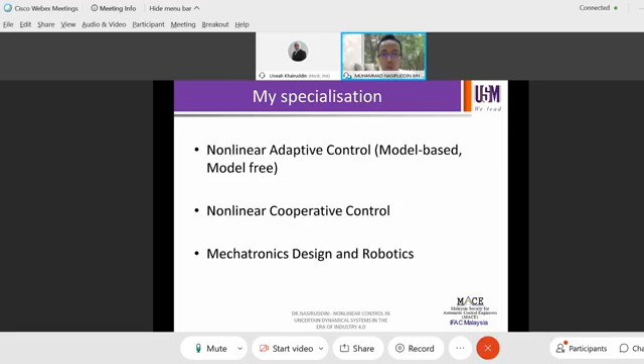Here's my specialization: I did my research in adaptive control, nonlinear control, and ventured into cooperative control. These two areas are my topics of interest. For today's talk, I would like to discuss mainly two types of systems: first, a single dynamical system with nonlinear control, and second, a cooperative system.

Before I begin the main technical talk, I would like to share with all of you some bits of motivation about control theory and technologies.

As you know, control is one of the driving technologies in Industry 4.0. In the case of a smart factory, components such as monitoring tools, instruments, sensors, HMI, and robots are essential, and control system is one of them. Control is often regarded as a hidden technology as it operates in the background of a dynamical system.

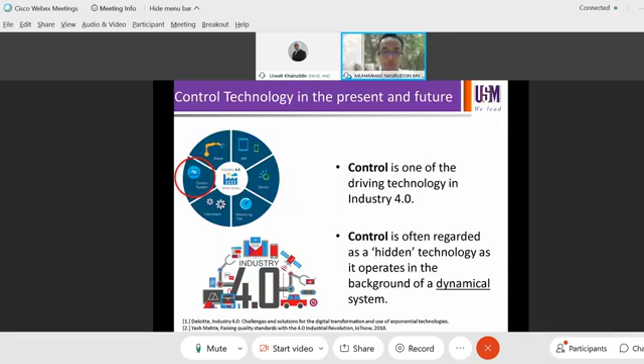Let's look at the modern factory. We can see a mobile robot, an independent robot doing warehouse safekeeping, and a specialist robot that does welding, painting, and material handling. As you can see clearly, human workers need to stand at a safe distance.

As robot technology evolves, humans can stand closer to the robotic arm because they have been equipped with some bits of compliance features. At the end, we see a Baxter, which is meant for cobots, or collaborative robots, created by Rodney Brooks. This particular robot is capable of a self-learning feature.

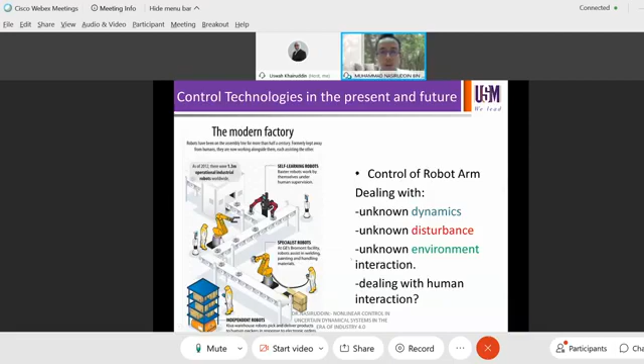In a nutshell, in the context of control, when we want to control a robotic arm we have to deal with unknown dynamics, unknown disturbance, and unknown environment interactions. In the context of a collaborative robot or cobot, we need to deal with human interaction. Therefore, uncertain dynamic information needs to be known or estimated when designing a suitable controller.

On the top left, we have a cooperative robot: two robotic arms trying to synchronize motion in pursuit of balancing a cup of water. On the top right, we see a Baxter capable of self-learning, but the dynamics remain unknown.

We also have a case where a robot is deployed or commissioned to do tasks in a remotely challenging environment, meaning an environment where humans cannot go, such as nuclear or very hazardous environments. In this case, the robot is deployed, but it is very important that they be controlled.

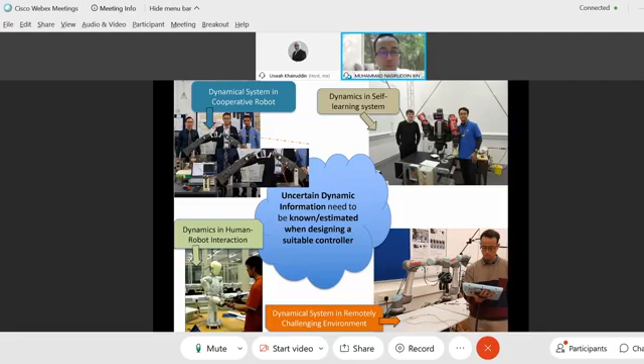The control strategy requires this dynamic to be estimated. In the bottom left, in the context of social robotics where human-robot interaction is involved, there are so many uncertain dynamics that need to be known when designing a controller.

In summary, uncertain dynamics can be classified into three parts: first, unknown or partially known system parameter information; second, unknown disturbance; and third, unknown nature of the environment or external interactions. This refers to human-robot interactions or an interaction where the robotic arm needs to engage in a task involving external objects.

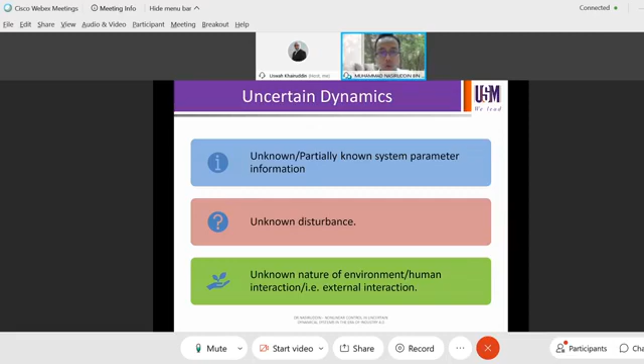So how do we deal with uncertain dynamics in control? There are several methods to mitigate uncertain dynamics, commonly known by most control scientists and engineers, for example linear control, which is meant to work within the linear operating region.

In the case of model-based nonlinear feedback compensation, we talk about model reference or indirect adaptive control, where there are many types of adaptive laws that can be used to estimate parametric information.

We also have robust control, such as sliding mode control or super twisting control, which works by strongly forcing the system to comply to a sliding manifold, for example, adopting a design philosophy where parametric information does not need to be known, because they use a strong signal to reject all these uncertainties.

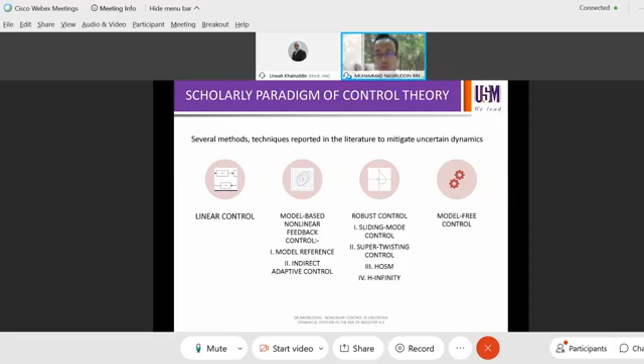Lastly, we have model-free control, which does not require parametric information but rather only requires the input and output signal of the system. Given the limited amount of time in this talk, I will just focus on the model-free control.

I would like to share with you the so-called Sejahtera concept in control. Literally it means peace, balance and prosperity. It means harmony and safety.

This definition is taken from the book The Genesis of a Sustainable Campus, 2007, USM. I like to borrow this concept in the context of control, so we can achieve a balanced controller, or a controller that is harmonious with the dynamical system and environment. Most important of all, to ensure or guarantee safe usage, we need a stable controller.

So just a thought: can we formulate a controller that is harmonious in tracking performance without the adverse expense of control effort? I would hypothetically suggest there is some kind of balance that exists between the control signal, the dynamical system, and the inhabited environment. Can they be peacefully balanced?

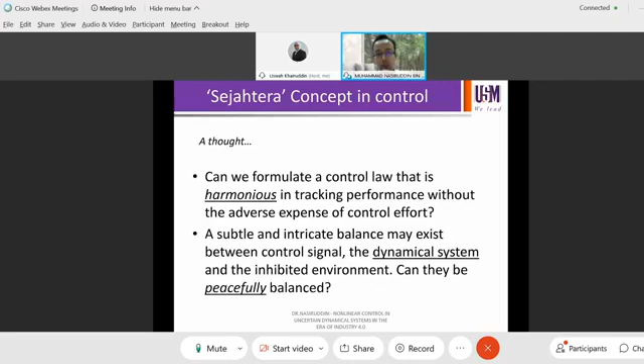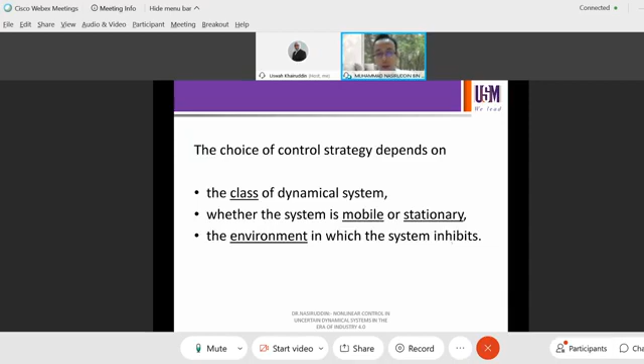The choice of control strategy depends on the class of the dynamical system, whether the system is mobile or stationary, and also depends on the environment in which the system inhabits. In this particular talk, I will only cover the class of dynamic system. So let's look at this class of dynamical system, shall we?

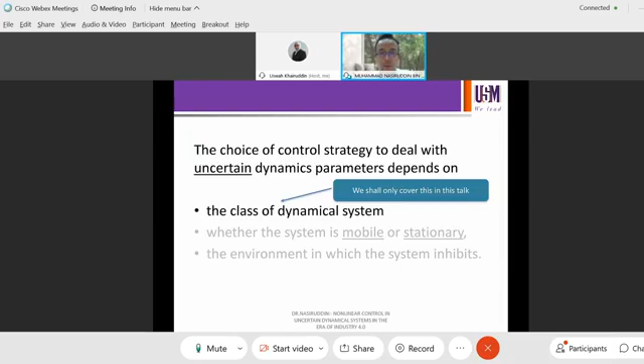Here we have the first class of dynamic system, termed multiple input, multiple output coupled system. An example is robotic arms, which I have been researching for the past 10 years. A MIMO coupled system is where each joint of the robotic arm needs torques sent to it, and the torques create motion to perform useful work. The uncertain parameters can be, for example, unknown mass, unknown link length, and perhaps unknown friction.

We have another class of dynamical systems: the non-affine system. A famous example is the continuously stirred tank reactor, or CSTR plant. This is actually non-affine in structure, as we'll see in a minute, and has highly nonlinear characteristics. Most of the time these parameters are unknown—there is nominal information, but the parameters usually change.

And we have a chaotic system here, which we'll discuss in depth later. This particular plant is very interesting in the context of Industry 4.0, because it's usually used for fault detection. Control engineers or control scientists only try to control it because it's a very unstable system, but if you're able to control it, you can make it useful.

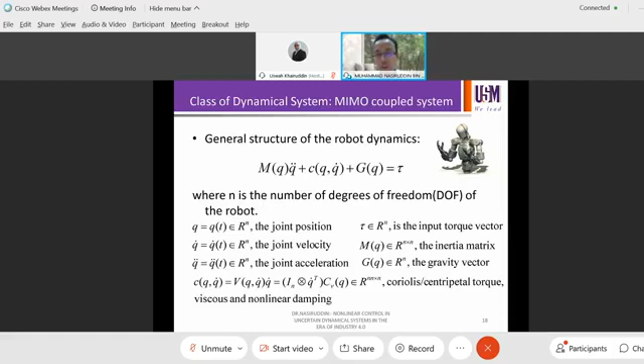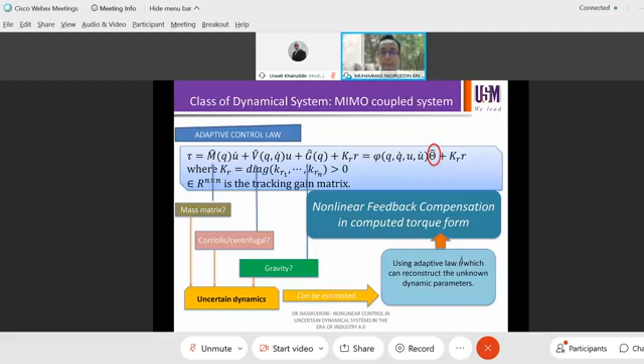So that's fine, and we only use the normal adaptive control law paradigm. We use nonlinear feedback compensation, where most of the time the mass matrix, Coriolis centrifugal, and gravity are not known and therefore need to be estimated. You can use an adaptive law available in the literature to reconstruct these unknown dynamic parameters online—it's not a big deal. This part is basically the compensation part, and this part is the servo tracking part. Further work can be referred to in my publications.

Now that brings up the question: what about the non-affine system? Can we apply the same concept, i.e. nonlinear feedback compensation, to a non-affine system to deal with the uncertain dynamics in the CSTR plant? The answer is no, it will not work, because the CSTR plant has a non-affine structure, as we'll see in a minute, that is heavily nonlinear.

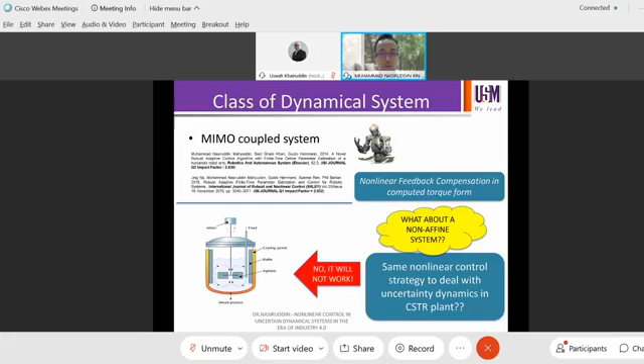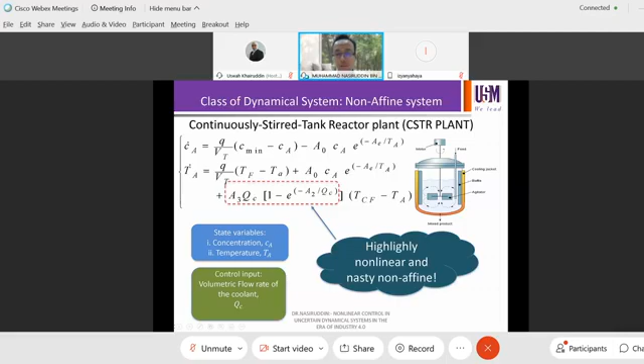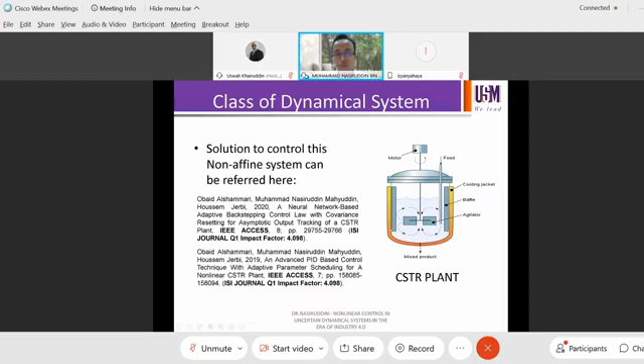There are solutions to control this non-affine system. I'd advise the audience to refer to my recent work, because since there's limited time, I will just focus on a dynamical system using a model-free approach. Let's look at this chaotic system and under-actuated system.

This is a chaotic oscillator. There are so many models, one that interests me is the Duffing-Holmes oscillator. It's used to detect machine faults in industry, for example. But before it can be used for fault detection, it needs to be controlled, because they are very highly unstable.

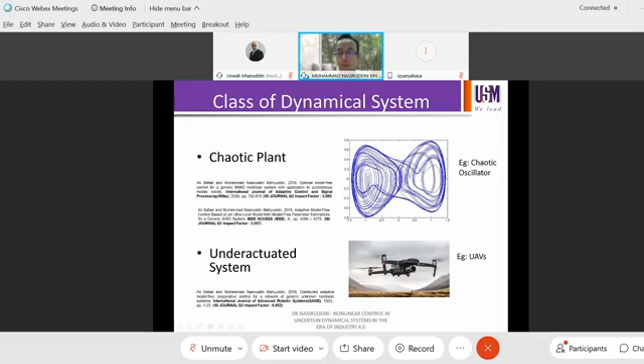I will explain this plant later in my main technical talk.

Bear in mind that uncertainty also exists in a cooperative setup. For example, in the leader-follower synchronization problem, multiple manipulators are meant to synchronize to their leader manipulator, interconnected by a graph, and they have dynamics such as mass inertia, centrifugal, and gravity vectors that need to be dealt with. These can be estimated online and used for synchronization control.

In the case of formation control, for an under-actuated system of drones, we want these drones to form a certain geometric pattern, and the controller needs to know about their dynamics. This so-called uncertain dynamics can be estimated online. Further referral is advised to the suggested reference.

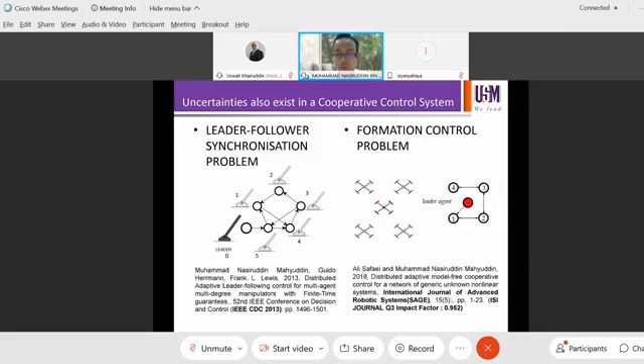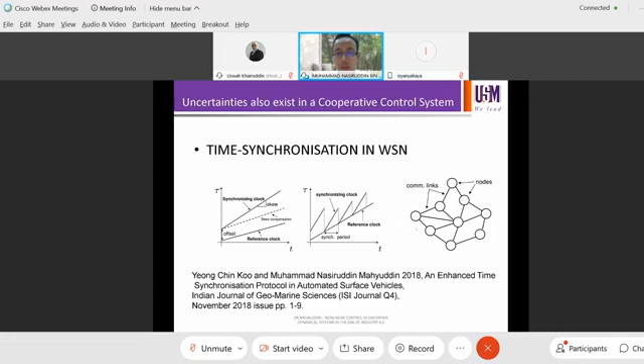Uncertain dynamics also exists in wireless sensor networks. We have a network of wireless sensor nodes, and one particular problem, still somewhat open but solved with many control techniques, is that the objective is to synchronize the reference clock, because each node has its own skew rate and offset. These are unknown and usually depend on the crystal clock they have, or the nonlinearity that exists in each crystal clock. Time synchronization using control technology can be used so that each node perceives the same reference clock, using basically a consensus control to achieve this objective.

Okay, let's move on to the technical part. I'd like to discuss the nonlinear control of a dynamical system, specifically adaptive model-free control for a robotic manipulator.

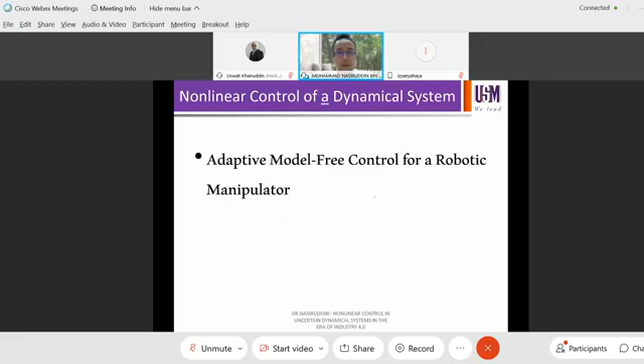We have an unknown nonlinear multiple-input, multiple-output function, f of x, u. This is a non-affine nonlinear dynamic system with system states x, and A is also unknown, a system matrix or Jacobian, referring to the coupling between system states. U is the control signal we'd like to design using a model-free approach, without having any information about the actual model of the plant.

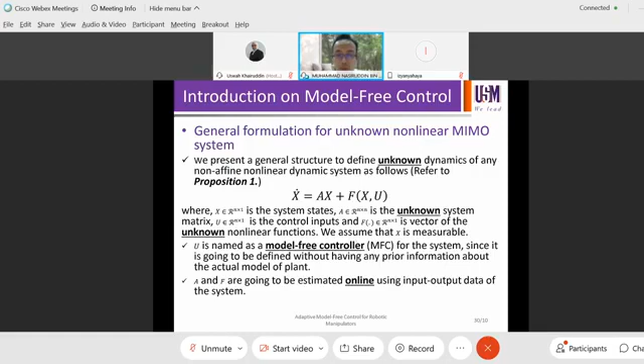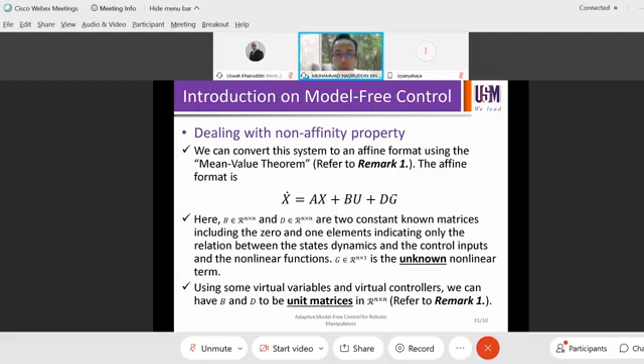A and F we would like to estimate online using input and output data. We can use the mean value theorem to separate this term so it becomes decoupled. This gives us a nice control input term and a nonlinear function G, and we use adaptive control to estimate G and A.

So we define the tracking error, where XD is the desired trajectory and X is the system states. We generate a tracking error, and zeta represents the integral error. By virtue of a model-free control policy, we combine the optimal term with a compensating term. The compensating term shows that G hat is an estimated nonlinear function, and A is an estimated system matrix. These two terms can be estimated online using adaptive control.

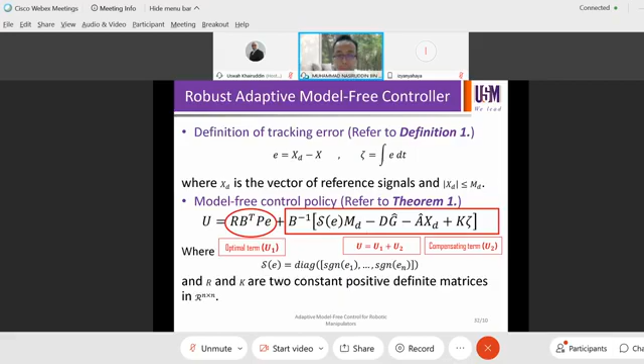I'd like to revisit the Sejahtera concept in control, reflecting on how we can achieve this. We denote V as a cost-to-go function, and J as a function comprised of tracking error and control effort. We like to balance these, trying to achieve some optimal solution that achieves tracking error at the same time as minimal control effort.

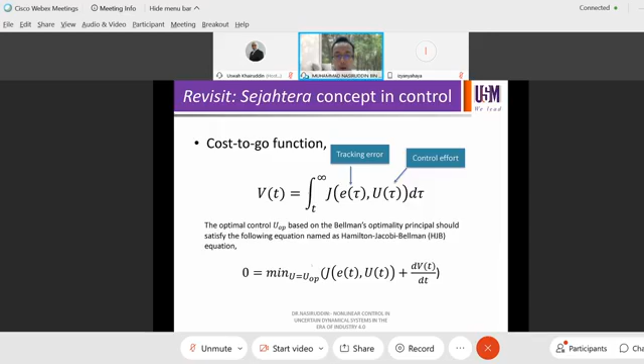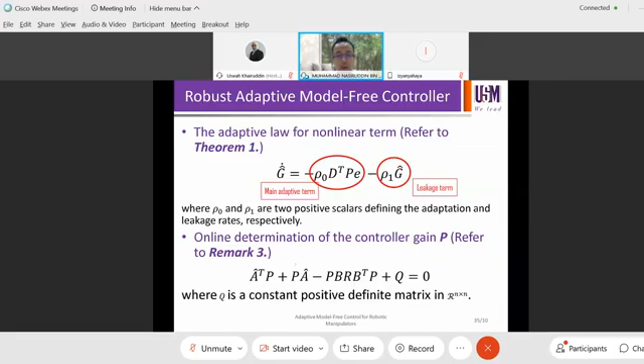Using the Hamilton-Jacobi-Bellman equation, we like to minimize this function. This particular nonlinear function is reconstructed using the adaptive law, and we have a leakage term here to stabilize the adaptation. Then we have online determination of the controller gain P, and this is actually the usual Riccati equation commonly found in adaptive control.

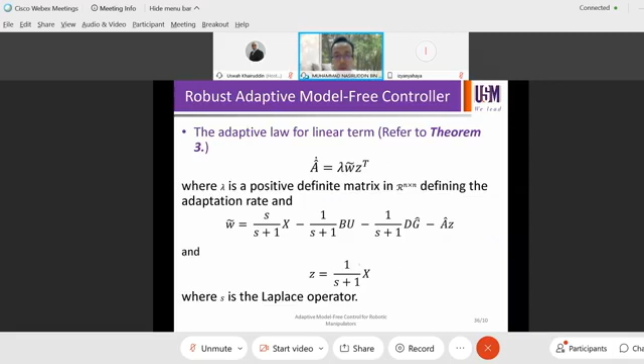This time, the linear term, which is unknown, is estimated online using filtered versions which comprise of states. We use information of the state, system input, and the estimated nonlinear function, estimated linear function. This is actually from a W tilde, which forms to reconstruct the A.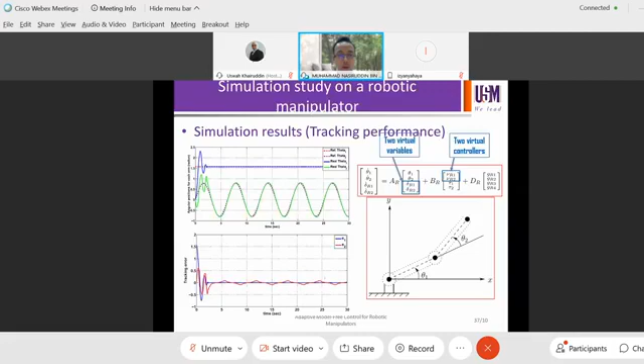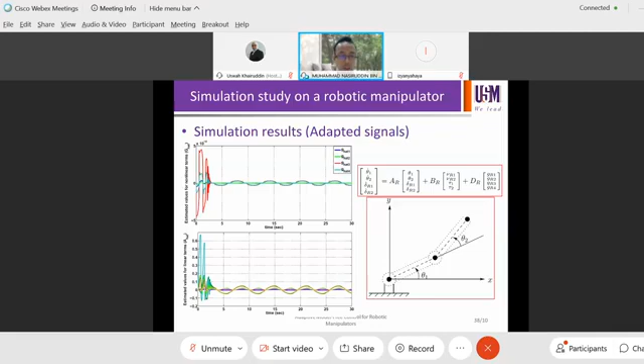With the case of estimation, as you know, uncertain dynamics can be estimated online with this particular model. And the linear term can also be estimated. So they are bounded.

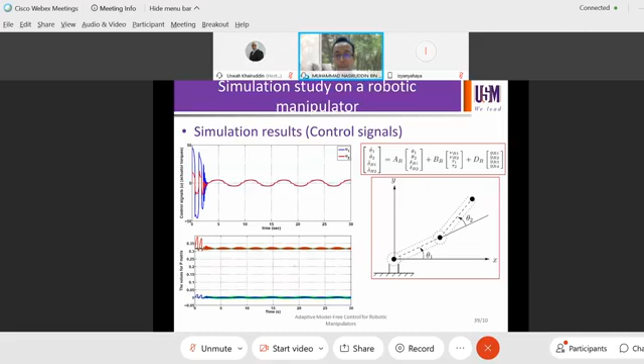Okay, so let's move on to the nonlinear control of a cooperative system. Just now we looked into a single dynamical system, a single multiple-input, multiple-output coupled system. Now we shall shift to a cooperative system.

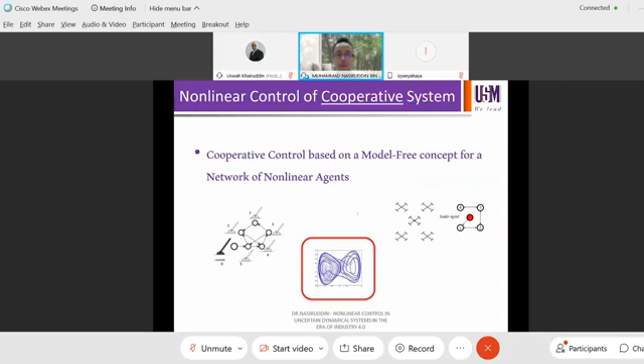I would like to pay special attention to a chaotic plant, because this particular problem, which is a leader synchronization and formation control problem, I have already presented work on these two types of cooperative systems back in September 2017, which was a MACE technical talk at MMU.

At that time I presented the formation control of quadrotors and leader-follower synchronization of multiple manipulators. I've discussed this in depth, but now in this technical talk today, let's look into this particular chaotic plant, specifically the Duffing-Holmes oscillator.

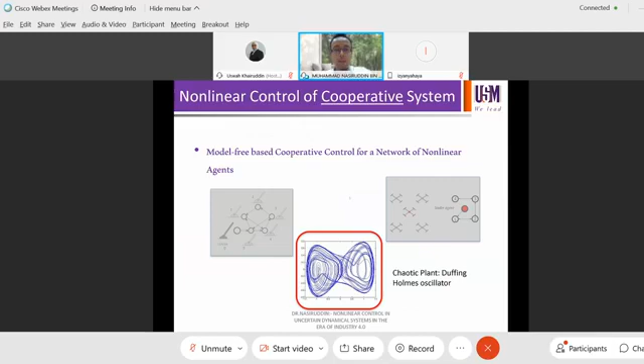I'd like to present to you the model-free based cooperative control for a network of nonlinear agents. Here is actually the dynamic equation for the Duffing-Holmes oscillator. According to the Brunovsky form, it has a second-order system, and has a nasty nonlinear term here, and a periodic term appearing here.

This is, as you can see, a non-affine term, because the control input is coupled with its own states. Each of the oscillators has its own states.

This particular chaotic plant is useful in detecting machine faults in the context of Industry 4.0. You place this oscillator in several parts of a machine, and it's special because this chaotic plant is sensitive to weak signals, but it is immune to noise.

Certain control scientists pay special attention to this special feature. So we, as a control engineer or control scientist, our task is to make this system stable.

We can excite this oscillator to whatever frequency to match with the frequency of a mechanical system. And once it is stable, then we can pass this oscillator to, for example, the test engineer or the instrumentation engineer, right?

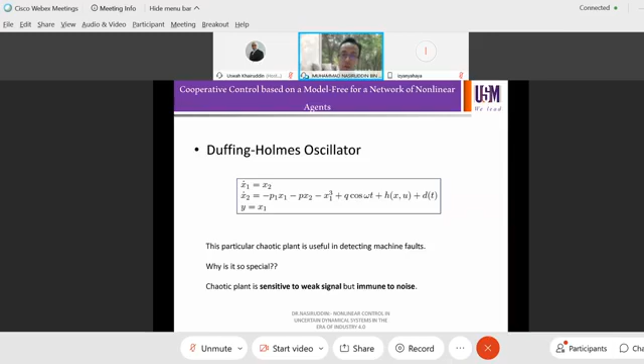I've cast this problem in the context of a cooperative system because, as you know, in the context of Industry 4.0, we don't place one oscillator. We can place many oscillators, and we can make them synchronize with each other. So we can connect these oscillators in a network.

I can name a few applications, one of them being fault detection, but they can be used for other applications as well. So the task for a control engineer like myself is to synchronize the states so that they are in sync. And I write the dynamics of each oscillator as an affine system.

This has been transformed into an affine system, and still we have G and A unknown, or uncertain. Then they need to synchronize to their virtual leader. So we write a consensus error, or cooperative error.

This is actually the usual cooperative error. We have these leaders and we have the neighboring agents. And A actually defines the connectivity between agent I and J.

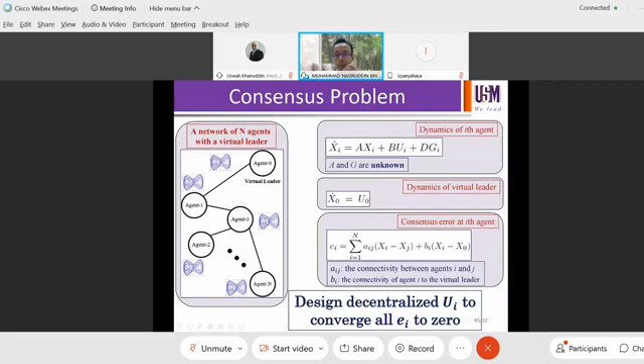What is unique about a cooperative system is that we can define the connectivity between this nonlinear system in a graph, and represent this graph in the form of a matrix. What's interesting about this matrix, in particular the Laplacian matrix, is that it has some unique features, and you can use this to analyze or prove convergence, to prove whether it is stable or not.

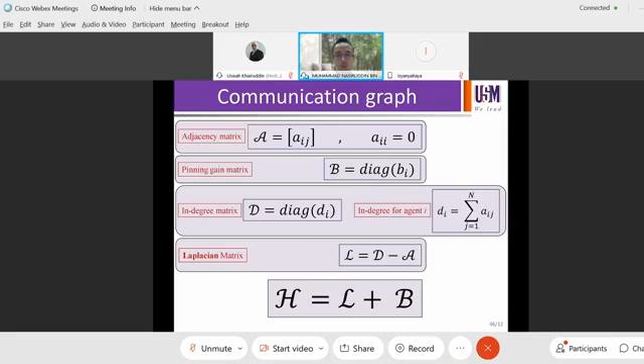So H actually contains information about network connectivity. Each of these agents knows the information about the network connectivity, and they also know about the neighboring control input. I will show you in a minute how this neighboring control input can be reconstructed. But let's focus on this part first.

In this protocol, it requires the control input of a leader. And like with the case of a single agent dynamics, it requires the nonlinear term, or we call it uncertain dynamics, and the linear term. So these two terms need to be constructed using the adaptive law.

This adaptive law for the unknown linear function is the same as what we have visited with the case of a single dynamic system. But for a nonlinear function, you can see here that it uses network information as part of the requirement to reconstruct the nonlinear function, and use the algebraic Riccati equations to update P using the estimated A.

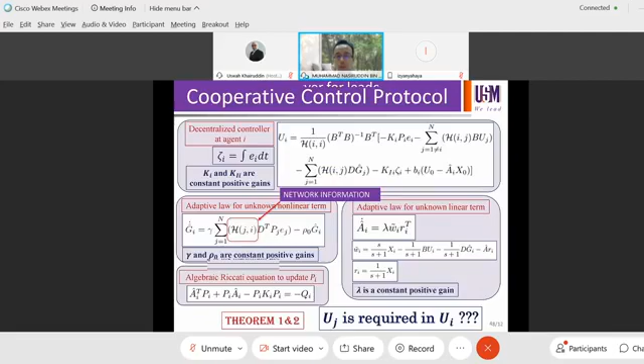We can suppose that in the event the states are a bit noisy, we can use the normal Kalman filter to clean up the states so that, for example, the reconstructed control input will not be noisy. So Kalman filter is hand in hand with the cooperative control here.

Bear in mind that the U0M is only the bounds. So it does not require the control engineer to know definite information about the control input of a leader, but at least the bounds of the control input are known a priori.

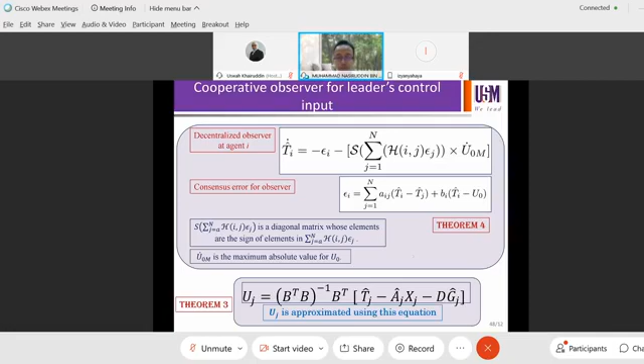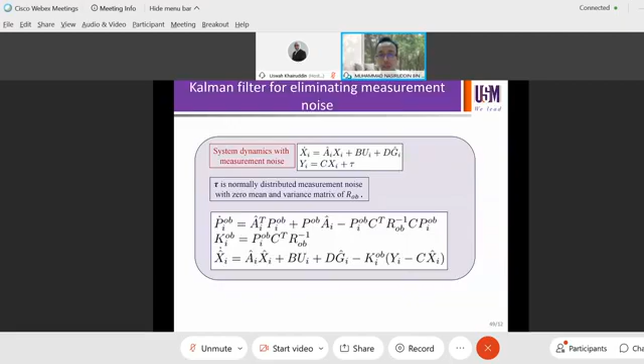And B is a pinning matrix. This is not a control input. The B is different from the B in this case. This B is a network-based pinning gain matrix.

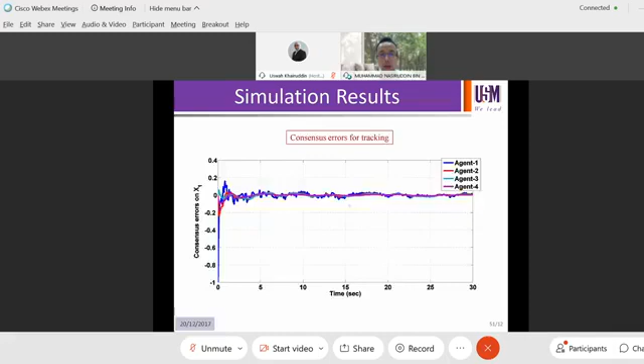So all of this chaotic oscillator synchronizes with its virtual leader, and the values and their states. Suppose they are commanded to follow a certain harmonic signal, then they are able to follow it despite being nonlinear and non-affine in their dynamic structure.

As you can see, the control input is observed using the observer, which is a cooperative observer. All of this is only one of the agents. The nonlinear term G is also estimated online, and the estimation is bounded. Same with the case of system matrix A—they are also bounded.

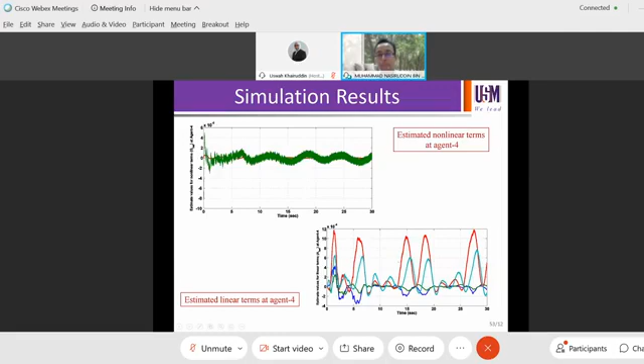In a nutshell, this consensus problem is solved for the network of completely unknown dynamic system, or in the context of this talk, uncertain dynamics. Then we use model-free controllers defined using a regressor-free approach, so we only utilize the input and output signals of a dynamical system. In the context of a data-driven approach nowadays, we can achieve this using minimal signals, and one of the controller gains is updated online at each agent.

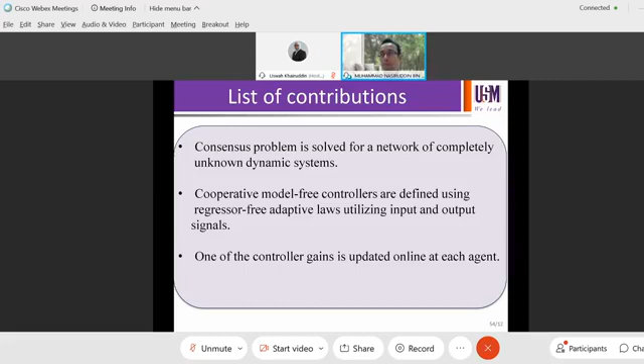So these are some bits of my research work on control of complex system theory and application. In this chapter, I discuss the many adaptive laws we can use, and one particular interest is finite time control, which is used for multiple output systems, and also single input, single output systems.

Work to do with human-robot interactions, in particular, whereby cooperative control is merged with robotic control, is discussed in this work.

Bits of information about my ongoing research: I'm doing research on the dual robotic arm for post-processing of nuclear decommissioning waste. This is actually a project involving reactors, hosted by the University of Manchester. In this particular project, the robotic arm needs to be controlled to work in a glove box.

So there's a glove box, and there is so-called radioactive material that needs to be dismantled or decommissioned. As you know, this is a good example of where robots and control are used in a challenging environment setup. This is still an ongoing project.